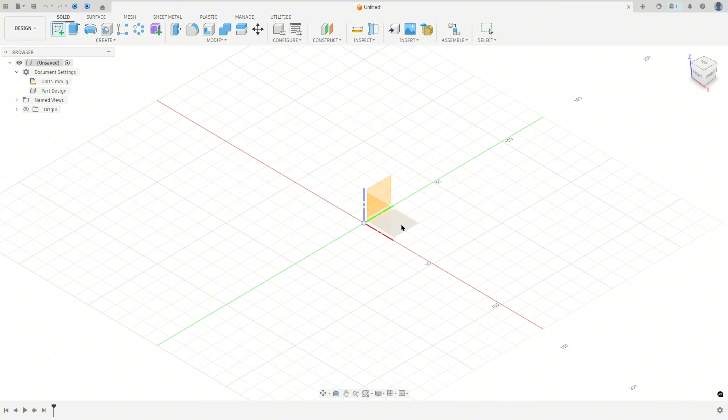So open Fusion, go to create a sketch, select the top plane, go to create, select slot, and select the center point slot. Click here in the midpoint, 50 millimeters here, 100 millimeters here.

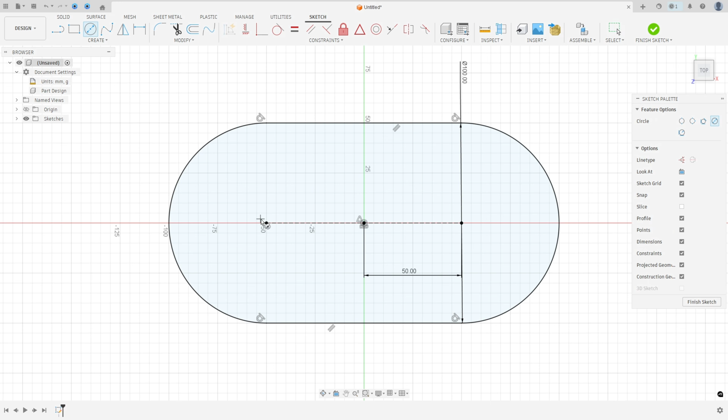Now we will create two holes here, two circles with 15 millimeters of radius. Select the circle, click here in this point. The diameter is 30 millimeters. Make another circle here, and make these two circles equal with the same dimension.

Now we use the same sketch to create the sketch of this top part here. To make this, we will make an offset, creating another slot here, using an offset with 10 millimeters of distance. Go to offset, select this slot, the distance here minus 10 millimeters.

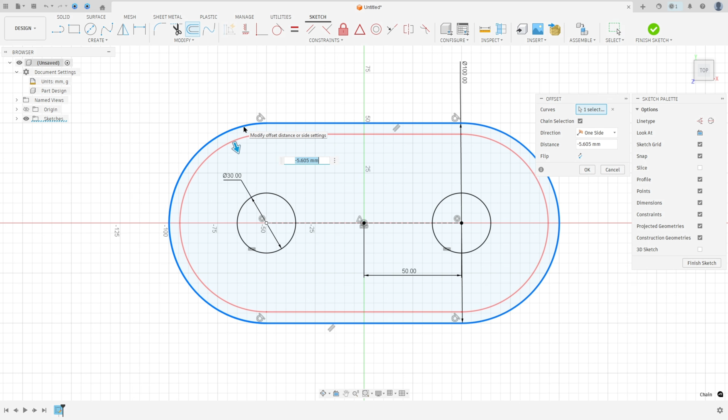Just to check the dimension, the radius here must be 40 millimeters, which is the same as 80 millimeters of diameter. Okay, now finish the sketch.

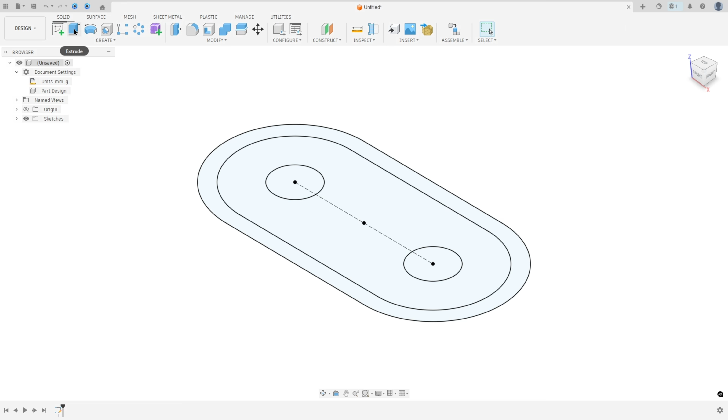We need to extrude this profile. So go to extrude. We will extrude this 15 millimeters, the base.

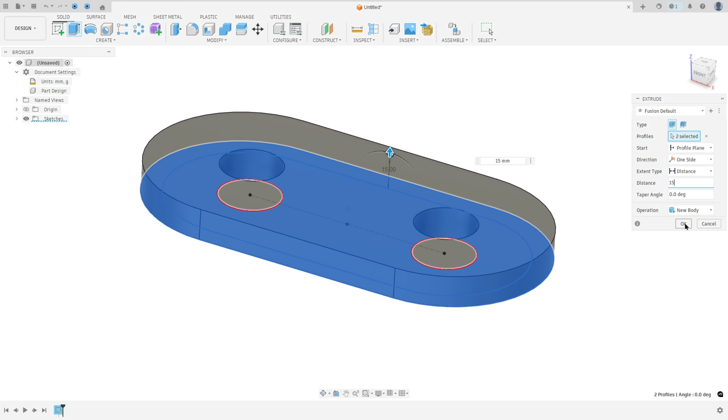Go to extrude, select all this profile. Don't select the circles here, okay? And the distance here, 15 millimeters. Operation new body and press OK.

We made this one. Now show the sketch again, and we will extrude the top part here. To extrude this, the distance between the top plane and this face here is 80 millimeters, 90 minus 10.

And we will extrude this. We don't have the dimension here, but we will extrude this 70 millimeters. Then we will make this cut here to remove this area, okay?

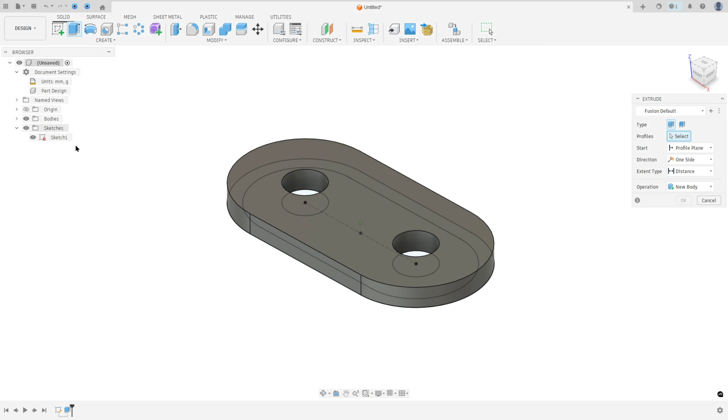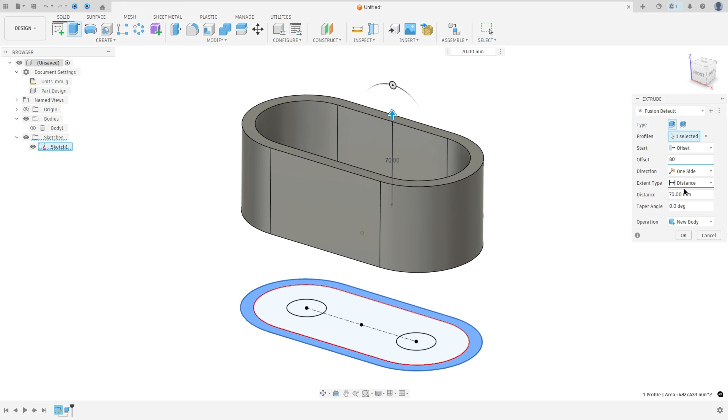So go to extrude. I will hide this body a little bit. Select only this profile, okay? And here, for the start, we use the offset, 80 millimeters of distance, okay? And the distance of the extrusion, we can use 70 millimeters and press OK.

Show the body 1, I will hide the sketch a little bit. We made this.

Now we will make this cut. To create this cut, we will create this line here. The angle between this line and this face here is 10 degrees.

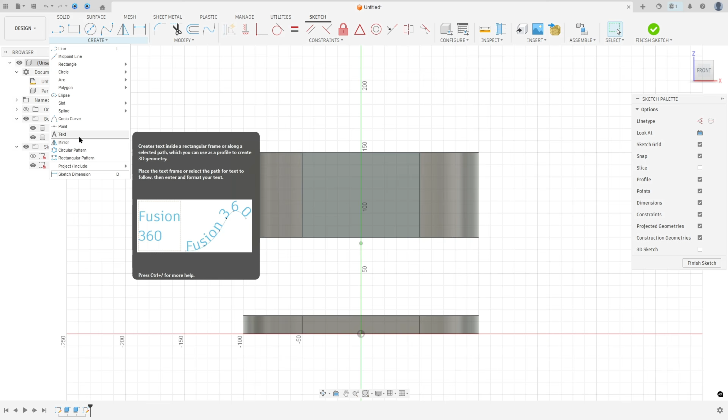Go to create a sketch and select this face, and go to create, select the project, include project, the selection filter, select the body, select this body here and press OK.

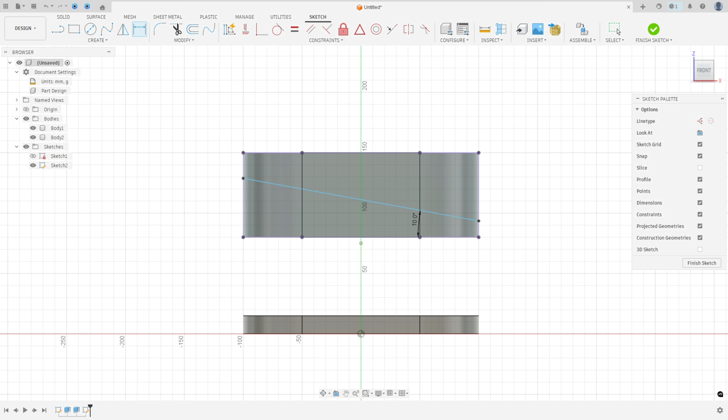Now select line, make a line between this point here, this line and this line, and go to sketch dimension. The angle here is 10 degrees, and the distance between this point here and this point is 10 millimeters. Select this point and this point here, the distance here 10 millimeters, and press OK.

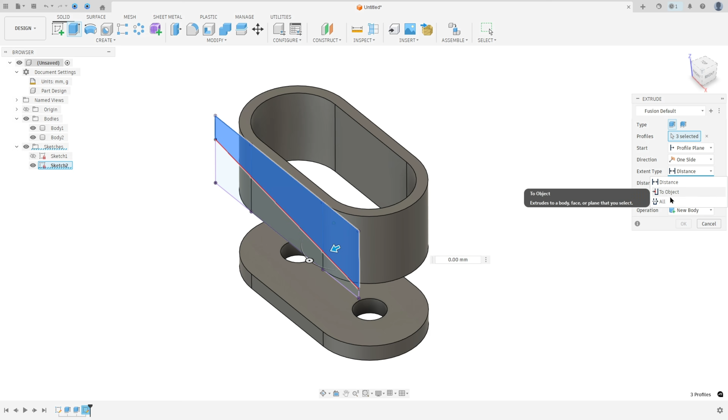Now finish the sketch, go to extrude, select this profile, and for the extent type, select all, flip the direction, the operation here is cut, and press OK. We made this one.

Now we will make this part here inside. We have the sketch here, we'll make this sketch. The first thing we make here, we will select this face to create a sketch.

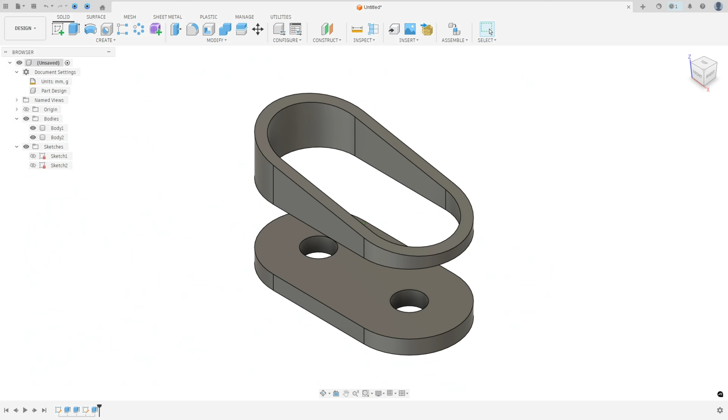Go to create a sketch and select this face. I will rotate this to the other side. Go to create, select the project, include project, select this face here and press OK.

This body, here we will create a slot with 100 millimeters, the distance between the centers, and the diameter is 50 millimeters.

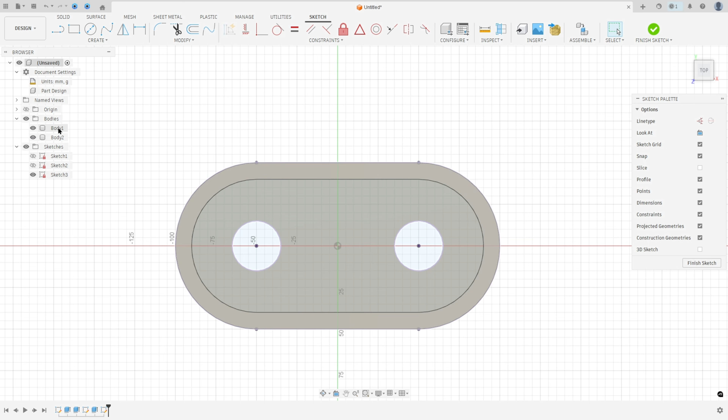Let me hide this body. It's better we created a project of this body here. Press OK.

I will hide the bodies. So go to create, select a slot, center to center slot, click here on this point, and in this point make a slot here. The diameter is 50 millimeters and press OK.

Now we'll create this line here and this one. The distance between the lines is 25 millimeters.

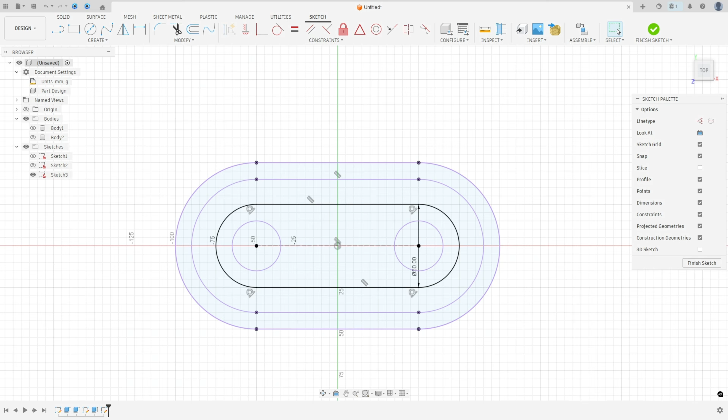Select line, make a line here, and make another line here. Make the same here, okay? This line here must be horizontal with this point, and the distance between these two lines is 25 millimeters.

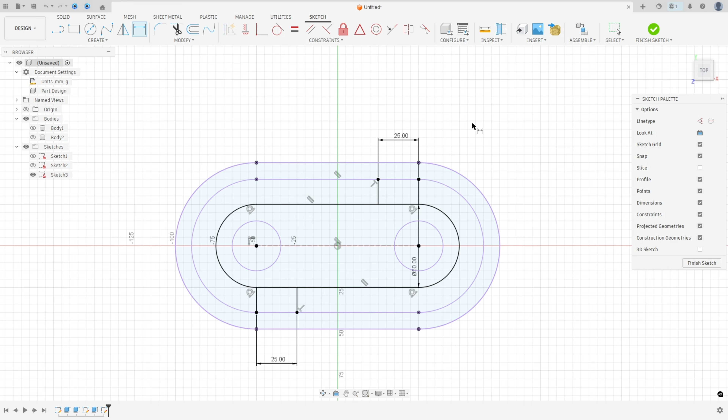The same here. Make sure that this line is horizontal with this point, okay?

And finish the sketch. Go to Extrude, select this profile, okay? Show body 1 and body 2, and the thickness here is 10 millimeters.

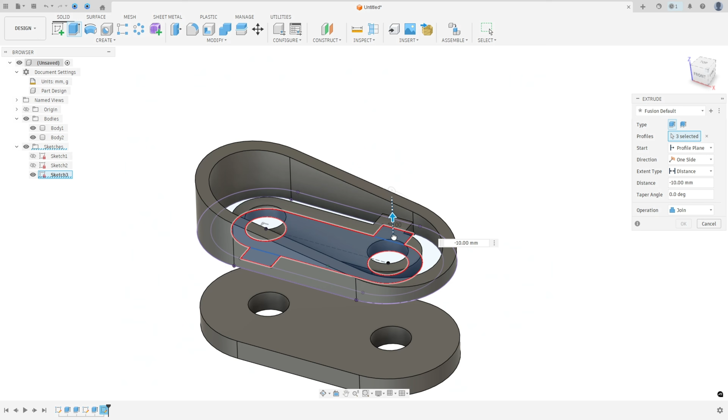So the extrusion here, minus 10 millimeters. The minus is just to change the direction. The operation join and press OK. We made this one.

And now we will create this sketch here, and we need to extrude this 10 millimeters, okay?

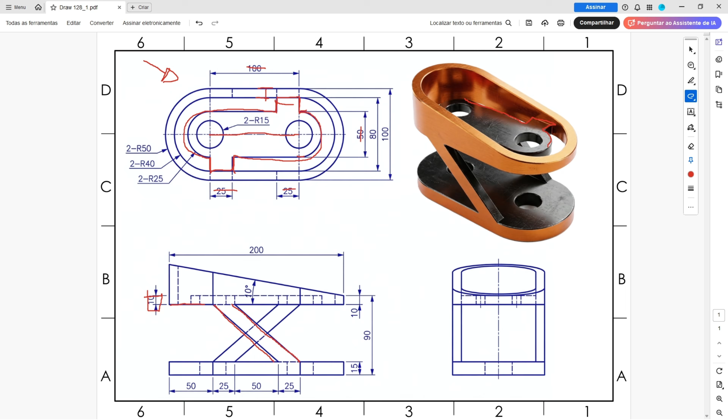So to create this, go to create a sketch and select this face. And go to project. I will rotate this a little bit, and here, select specified entities.

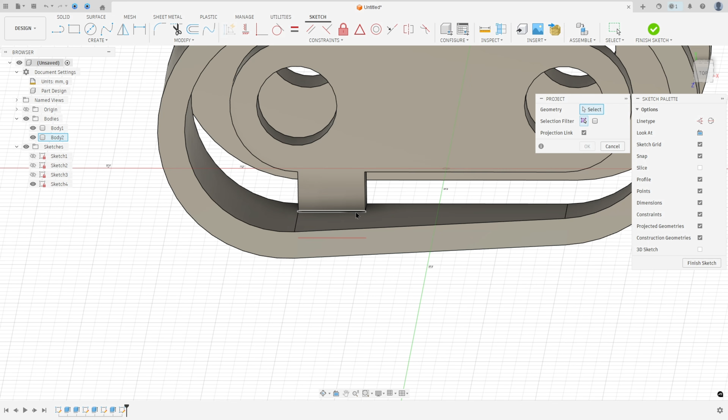Select this edge here. And select this edge here. Press OK.

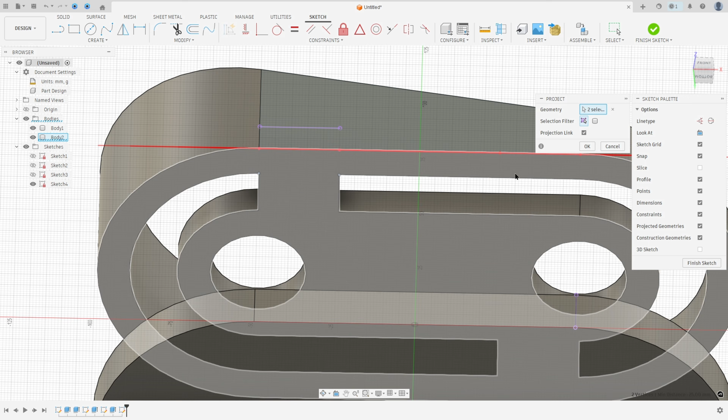Now select a line, make a line between. It must be here on this side, sorry. Let me rotate this. Select this point here and this point here. You can delete this line here.

Now select a line, click here in this point, make a line here between these 2 points. Make a line between these 2 points here and make a line here.

Go to sketch dimension. The distance here must be 25, or make sure that these 2 lines are parallel with each other, okay? And you need to create this line to make a profile here.

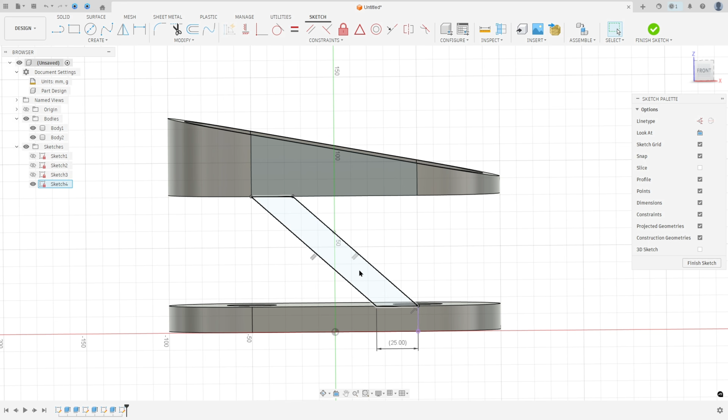So finish the sketch and go to extrude. The distance here is minus 10 millimeters. And operation join, press OK.

We made this. Now we need to create it on the other side. To create it on the other side, you go to circular pattern.

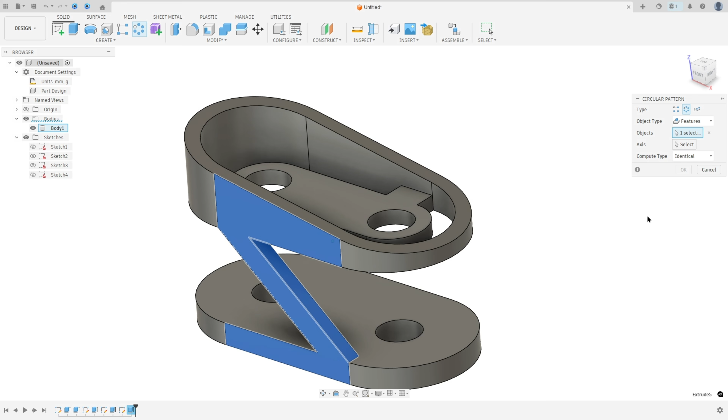The object type, select the features. And the object, select the last extrusion here. The axis, select this axis here. The quantity here is 2. Press OK. We made this.

So here we finish our exercise.